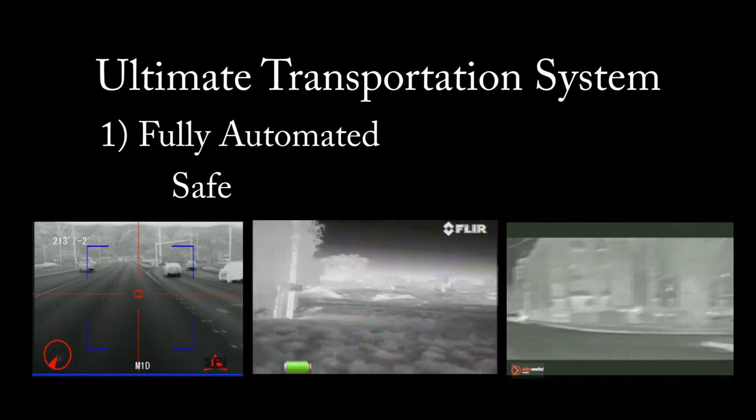First, the system must be fully automated. An automated system is a safe system. Automated vehicles would see in all directions and in complete darkness. An automated vehicle would never tire or be distracted by children. It would have nearly instantaneous response times and the combined knowledge of every vehicle in the system. It would save thousands of lives, not to mention countless injuries.

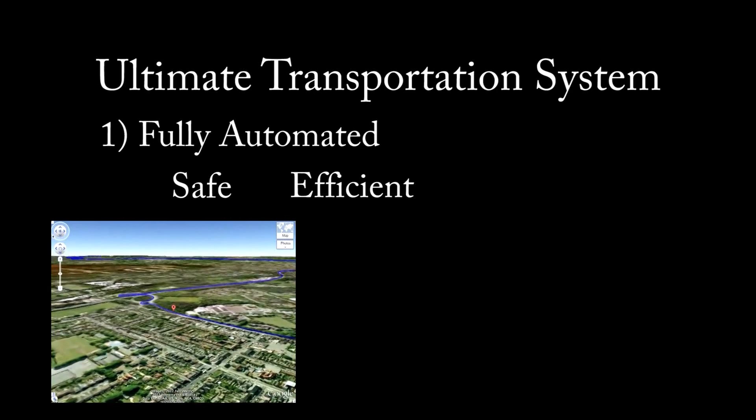An automated system is an efficient system. Vehicles would know exactly which route to take and how much braking force to apply. In fact, automated vehicles would rarely brake at all, instead moving through the system in precise coordination with every other vehicle. An automated system provides mobility for everyone: young people, the elderly, the handicapped, and freight would move through the system with no human intervention at all.

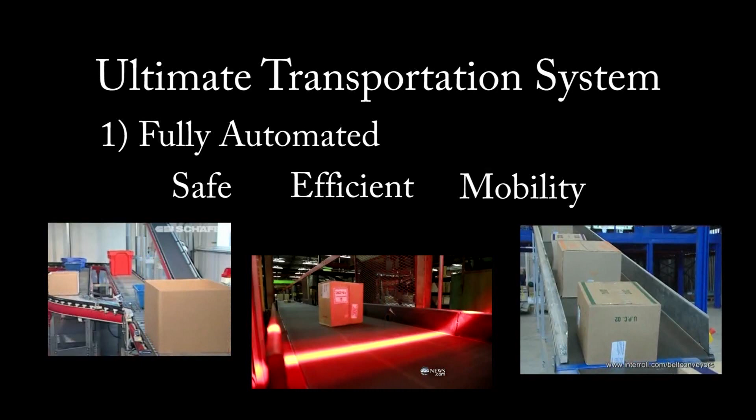Second, the system must provide door-to-door service. 86% of all miles traveled are by automobile, not public transit. That's because people are either unable or unwilling to make transfers. Nobody wants to lug groceries between bus and light rail. And for most of us, the bus does not stop at our doorstep. Only an individualized transportation system can accomplish this. In transportation, this is known as the last mile problem, the mile that is most difficult to service.

So in our design, we will stipulate that the vehicles will take you directly to where you want to go, without transfers and without stopping.

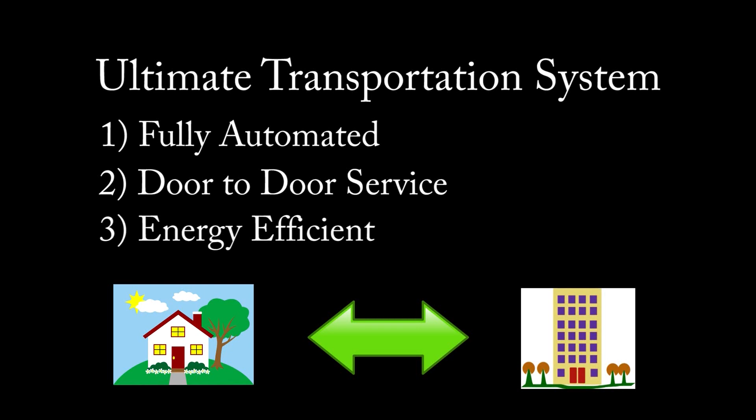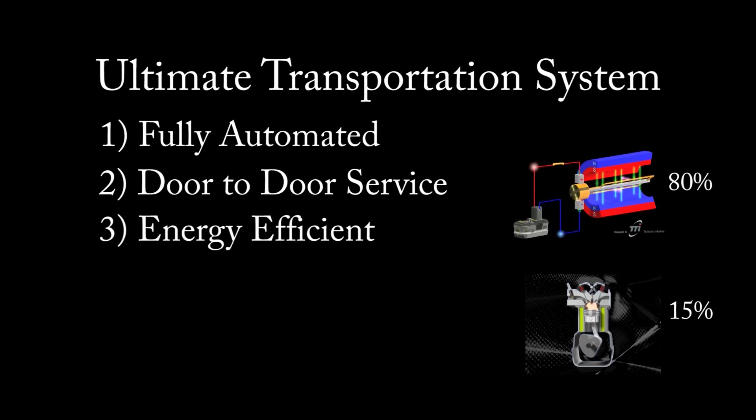Finally, our system must be energy efficient. It must take you from point A to point B using the least amount of energy, and that requires an electric motor. Gasoline engines operate at 15% efficiency, electric motors at 80% efficiency. Gasoline engines create exhaust. Electric motors are clean, quiet, and extremely reliable. Finally, electricity is energy agnostic, meaning the source is whatever makes the most sense: wind, solar, nuclear, or all of the above.

So this brings us to an important design decision. Do our vehicles run on asphalt or on rails? The answer is rails. The inherent problem with the electric car is the battery. It makes an otherwise environmentally friendly design environmentally unfriendly. A system that runs on rails doesn't need a battery, instead drawing power directly from the rail.

And it's not the deadly third rail you might imagine. 48 volts is sufficient to move individualized vehicles. It's the same voltage many amusement park rides use.

But aren't rails too restrictive? Not really. Think about everywhere you travel today, everywhere you go. Hundreds of people travel those very same roads day after day. And if we overlay rail on top of those very same roads, you have the same mobility.

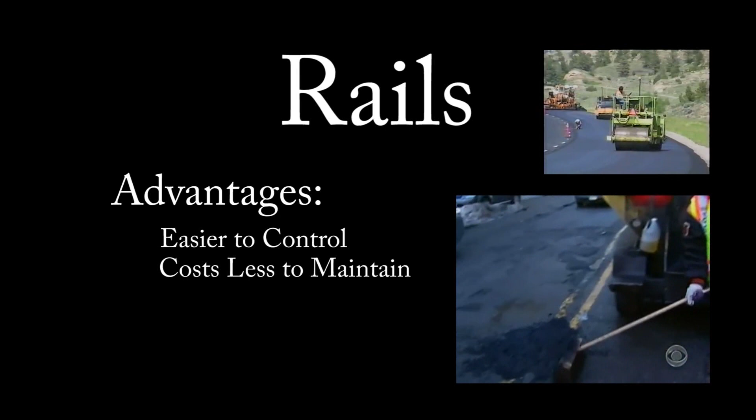And there are other advantages to rail. Vehicles are much easier to control, no bouncing off potholes or sliding off the road. And once you've built the system, rails cost less to maintain. Finally, rails are environmentally friendly since you're not running rubber tires over asphalt.

So we have individualized vehicles running over our existing road infrastructure on rails. Since all vehicles must perform reliably, individual ownership is no longer practical. Vehicles would instead be a shared resource, a sort of automated taxi service. You just call up a vehicle, ride to your destination, and step out, leaving it free to seek out the next passenger. And like a taxi, you would pay by the mile.

The other advantage of a shared resource is that you only need enough vehicles to cover peak usage. And since automobiles spend the vast majority of their time parked, we need a lot fewer vehicles to produce, fewer vehicles to maintain. And just imagine what we could do with all the parking spaces we no longer need. We could turn parking lots into parks, gas stations into rest stops. And since the system wouldn't require the full road surface, we'd have a lot more room for bicycles and pedestrians.

So how could we convert from the system we have now to the system we've described? The challenge isn't the technology to run automated vehicles. DARPA's design contests and Google's driverless cars prove we already have the technology. In fact, it's actually a lot harder running automated vehicles on asphalt roads shared with humans. A design that instead restricts vehicles to rails would be much easier to implement.

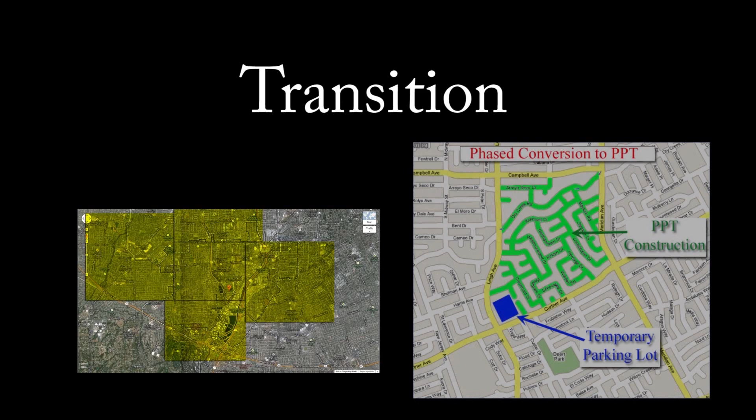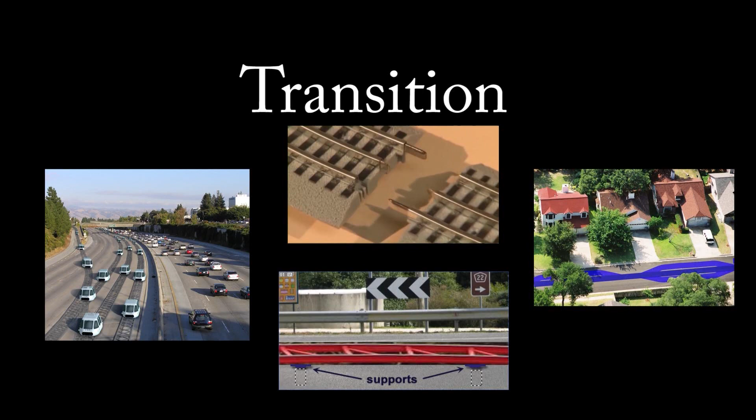The real challenge would be the transition. It would need to happen fast to minimize disruption. We would convert entire cities, one neighborhood at a time, not in months or weeks, but in days. Remember, we're not bulldozing new roads, we're mounting rails atop the existing ones. It would look a bit like how a child assembles a toy train set. As quickly as each prefabricated rail section is installed, it would be ready for use.

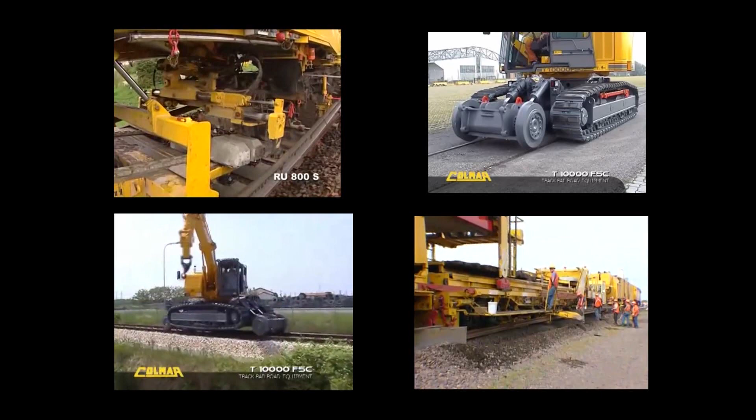How fast could we lay down rail? In 1869, a record 10 miles of rail was laid in a single day. And this was in a time when they used horses and pickaxes, not modern construction equipment. If the record back then was 10 miles, just imagine how many miles we could install in a single day.

So there you have it. This is one vision for the future of transportation. Perhaps you have another. Ultimately, the numbers will dictate the solution. Each proposal must address the same basic design requirements listed earlier: safety, convenience, efficiency. And each design has a cost, both in dollars and to the environment.

I understand that people like to drive, so do I, and there will always be places to drive, fun places. But nobody enjoys sitting in traffic or searching for parking spaces. The reality is that our current system is just not sustainable. At what point do we decide that there are too many cars on the road? Incremental is not going to solve this. We need to think beyond small changes. It's time to reinvent transportation.